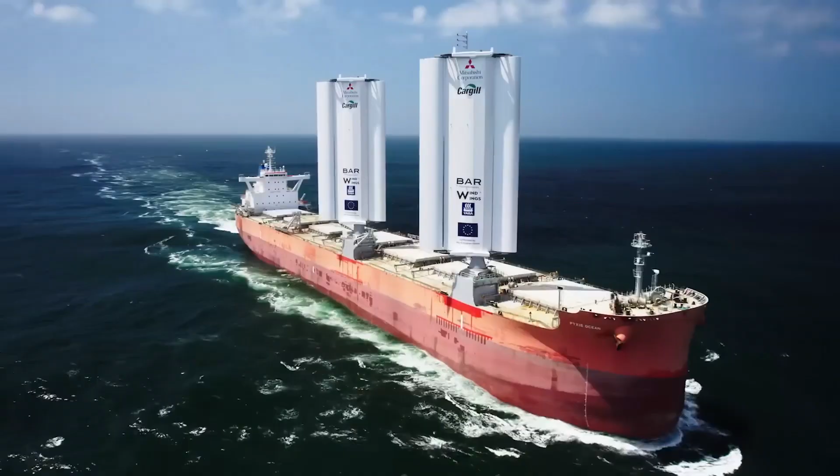This project is truly revolutionary. It's never been done, specifically not in this size and this scale. For us, it's more than commercial. We believe in decarbonisation of this planet.

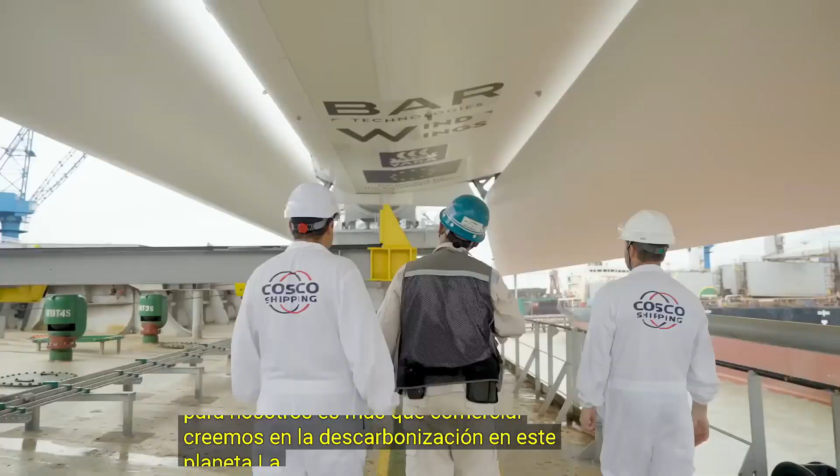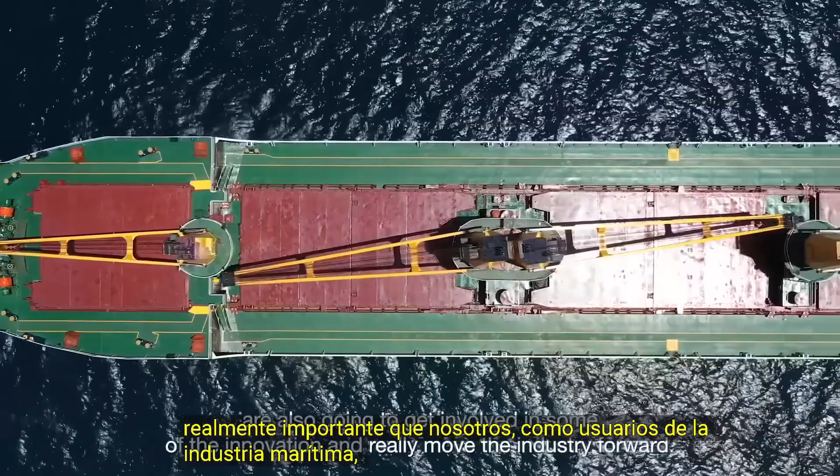Innovation doesn't exist without taking risk, but we think this technology is really a game changer. The maritime industry is an extremely hard industry to decarbonize, so there's not many tools that you have. So it's really important that we as users of the maritime industry are also going to get involved in the innovation and really move the industry forward.

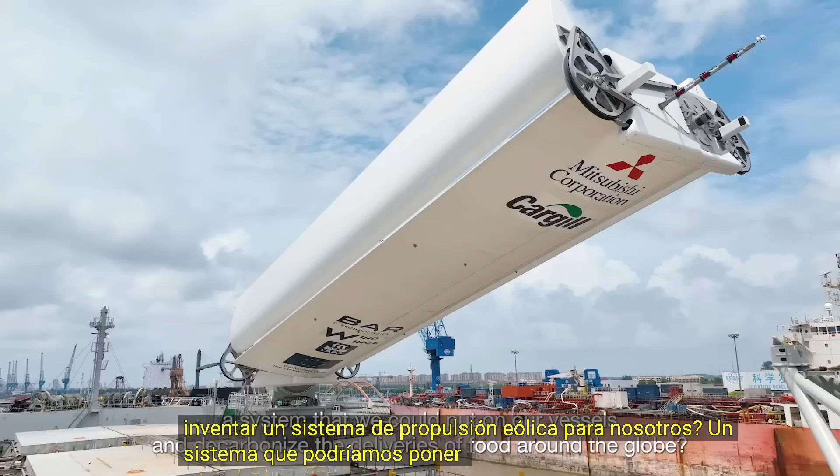Cargill phoned us and said, could you actually invent a wind propulsion system for us? A system that we could put on our vessels and decarbonise the deliveries of food around the globe. They arguably know more about shipping than BAR Tech. We're the techie guys knowing how to invent things, and that partnership's been really, really strong. So we fed off each other, and that's about energy, expertise, technical know-how, and drive and determination, because what we've done together is not easy.

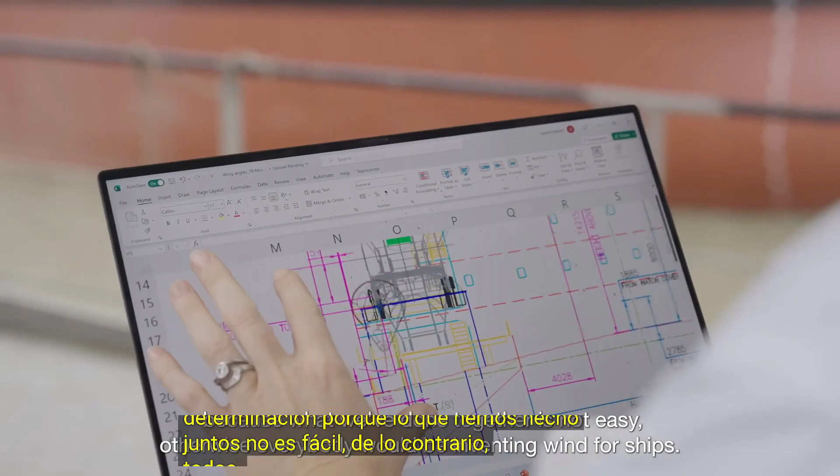Otherwise, everybody would be inventing wind for ships. We were looking for interesting technologies that we could bring in-house in order to make the maritime industry greener. And then we came across Bar Technologies with the assisted wind propulsion as a super cool technology to embark on.

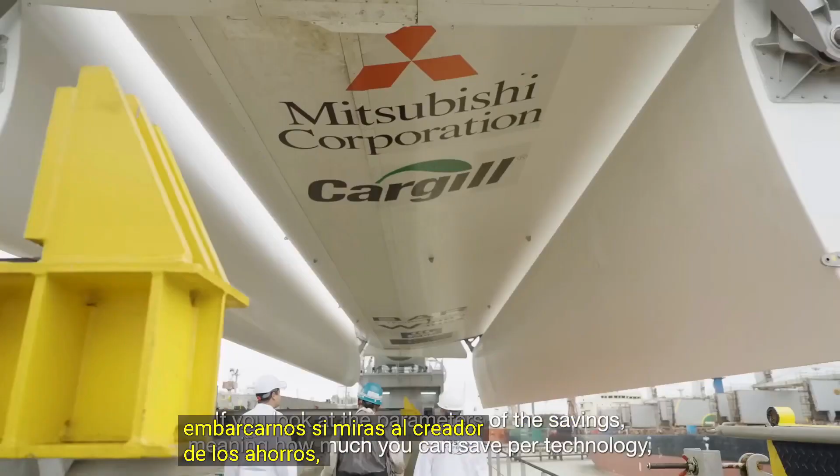If you look at the parameters of the savings, meaning how much you can save per technology, wind propulsion is one of the biggest levers you have. There are so many energy-saving devices in the market today. Wind-assisted propulsion system is one of the very few solutions available that can achieve fuel savings by double digits, and it can be retrofitted.

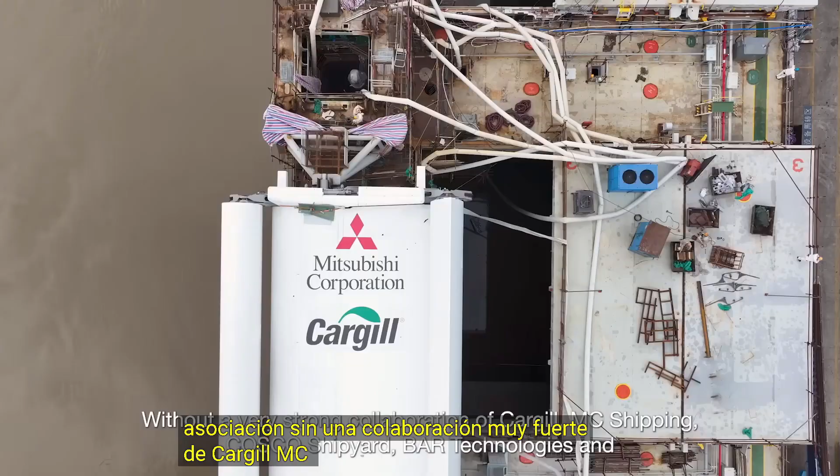One of the strong learning points in the shipping industry is it's all about partnership. Without a very strong collaboration of Cargill, MC Shipping, COSCO Shipyard, Bar Technologies and Yara Marine Technologies, we would not have been able to bring wings to the water that fast.

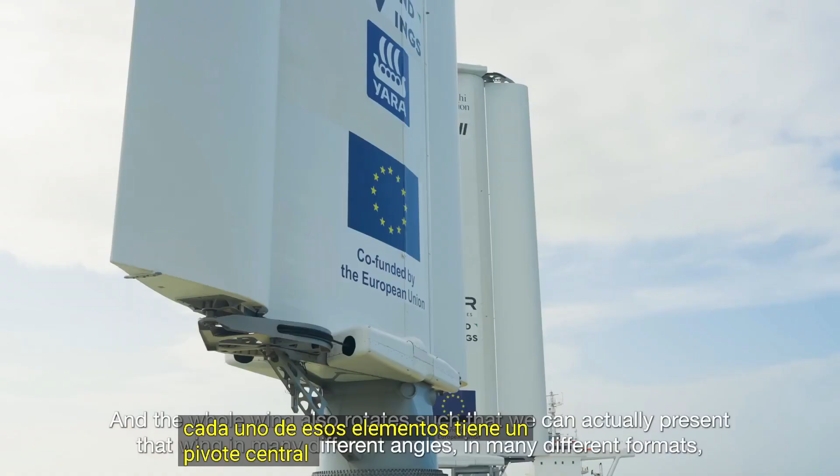The wind wing is made up of 3 elements, each 37.5 metres tall. The middle one is 10 metres wide, and the front element is 5 metres wide, a duplicate of the rear element, which is also 5 metres wide. They work together, each with a central pivot, and the whole wing also rotates, so we can present that wing in many different angles and formats, depending on the wind angle and wind speed.

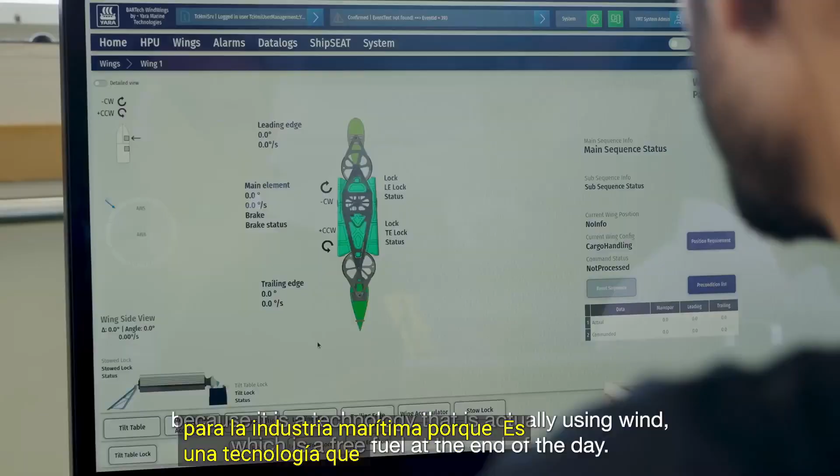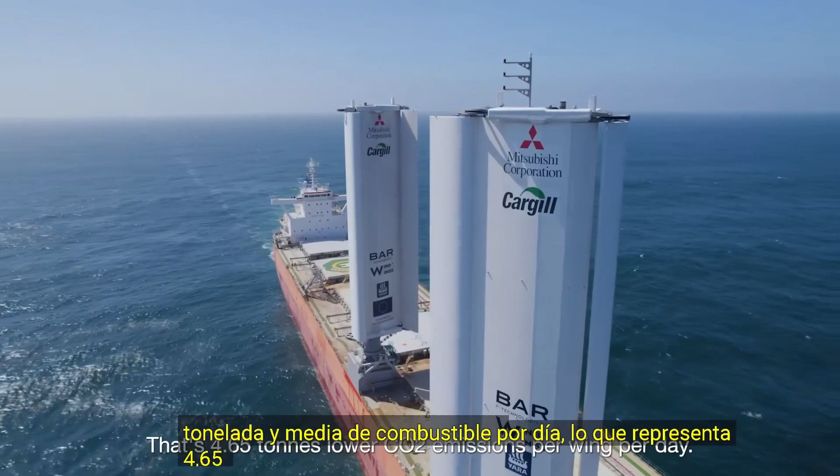This innovation is extremely important for the maritime industry because it's a technology that actually uses wind, which is free fuel in the end of the day. Each of these wind wings is saving 1.5 tonnes of fuel a day, that's 4.65 tonnes lower CO2 emissions per wing per day.

That's next level savings. We hope to gain a lot of insights from Pyxis Ocean, which would open the doors to expanded application to other ships in our existing fleet. The real fight is the legacy fleet and these new builds in the future, to bring the grain in the case of Cargill, or other goods around the world, and emitting far less.

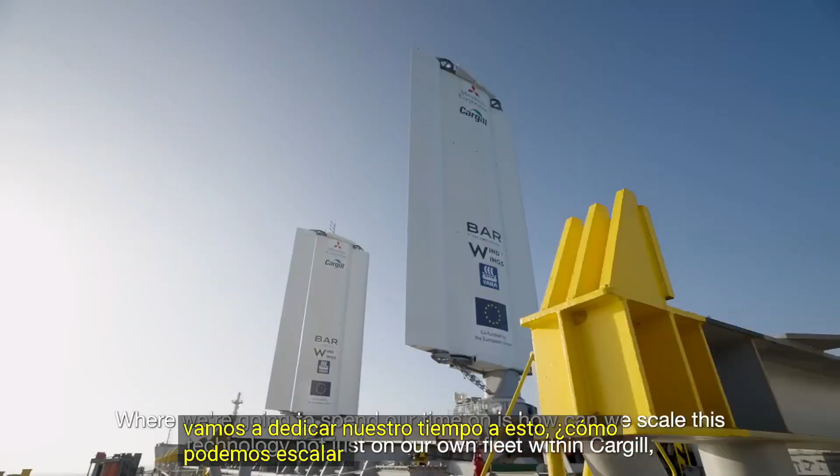Where we're going to spend our time on is how can we scale this technology not just on our own fleet within Cargill, but also very much in the rest of the industry.

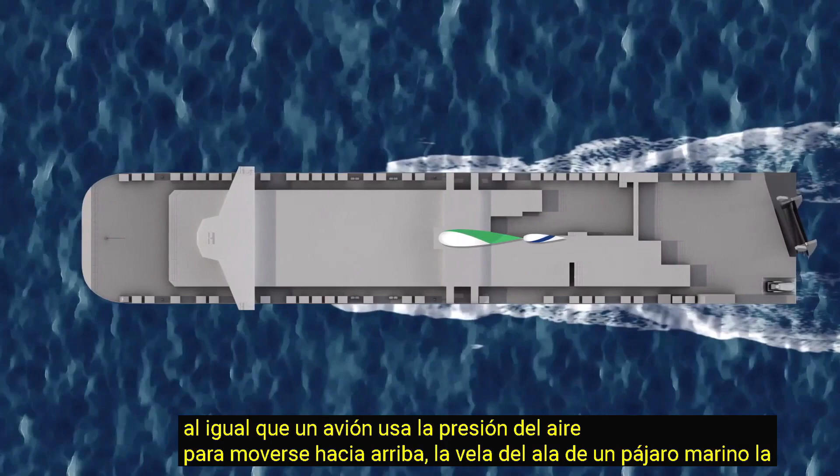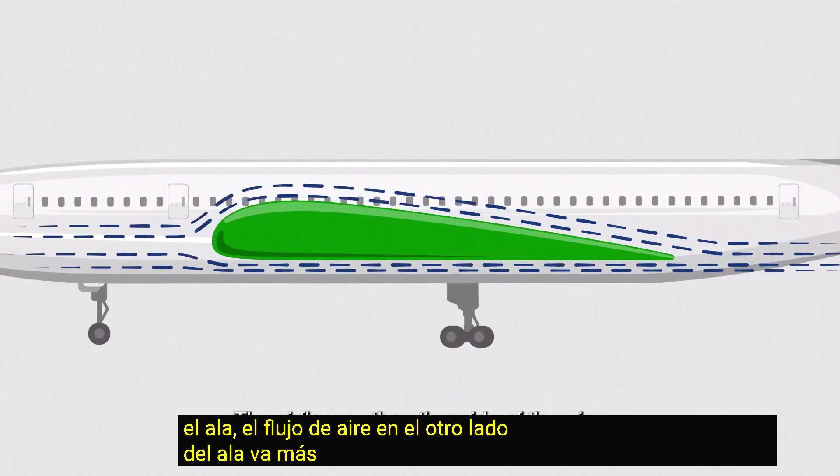Just like an airplane uses air pressure to move upwards, the Oceanbird wing sail uses it to move forward. The air under the wing is slowed and deflected downwards, which generates pressure on the wing. The airflow on the other side of the wing goes faster than the air beneath, and the pressure differential generates lift. The wing is also resisting the airflow, generating another force called drag that pushes back.

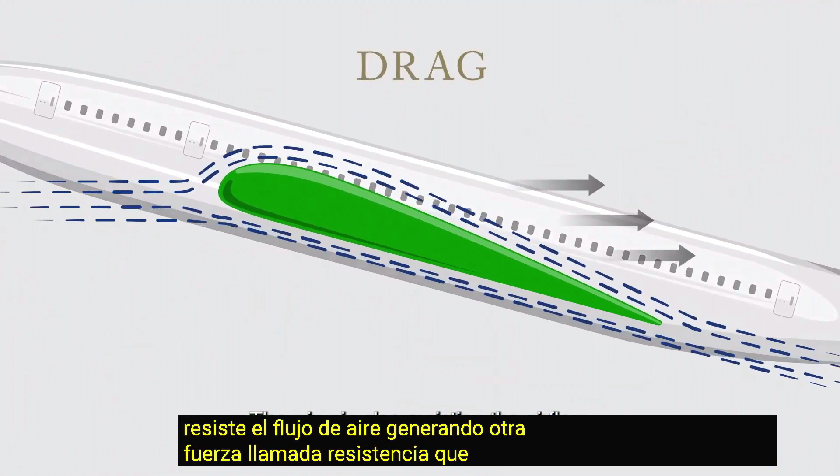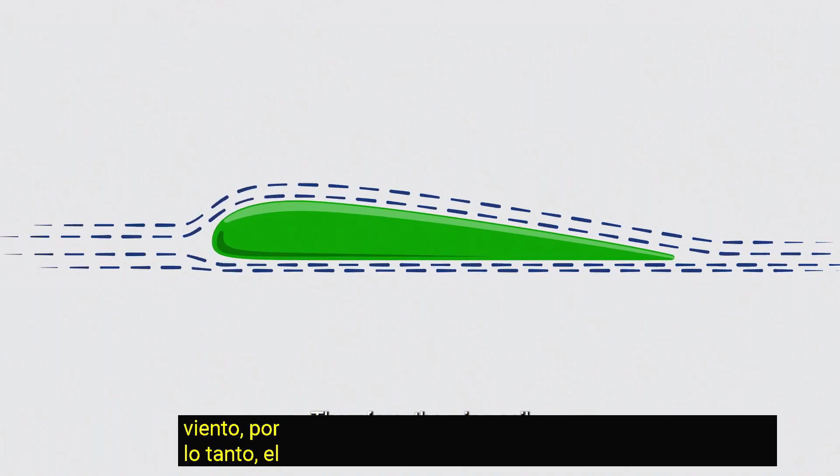To generate the most thrust forward, it is important to position the wing to get the optimal angle of attack from the wind. Therefore, the wing sail follows the wind, and unlike a plane, the wing must be symmetrical to be able to take power from the wind on both sides.

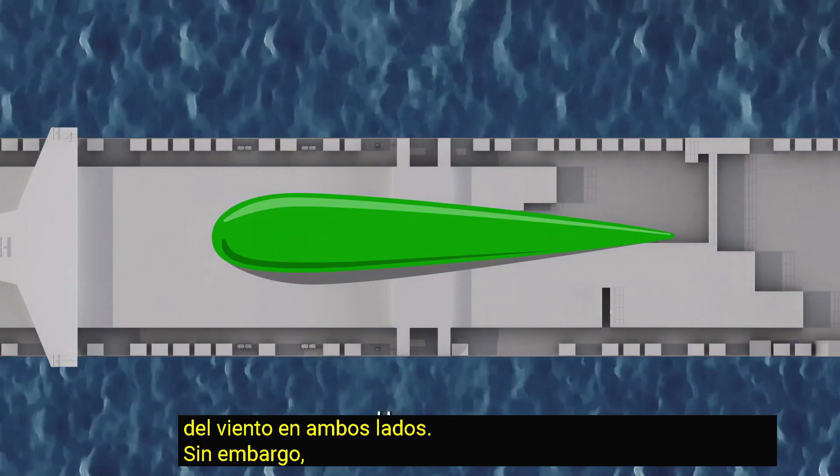However, the symmetric design has no curved camber like a textile sail when the wind blows, which optimizes the power you can harvest from the wind. That is why the Oceanbird wing sail consists of a mainsail and a flap. They form an asymmetric shape where the wind is accelerating on the outer part of the wing and decreasing on the inner part. This increases the lift and therefore the overall performance.

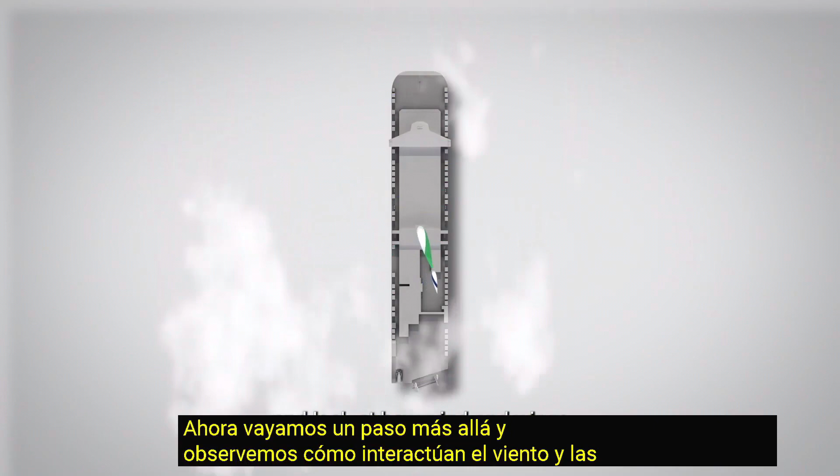By this design, we can adjust the overall shape by changing the angle of attack and create camber, which dramatically increases the performance. Now let's take it a step further and look at how wind and wings interact under navigation conditions. The actual wind is called true wind.

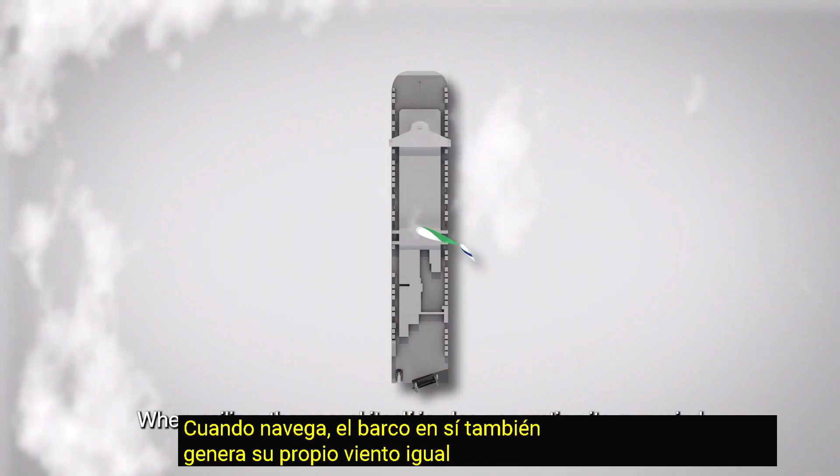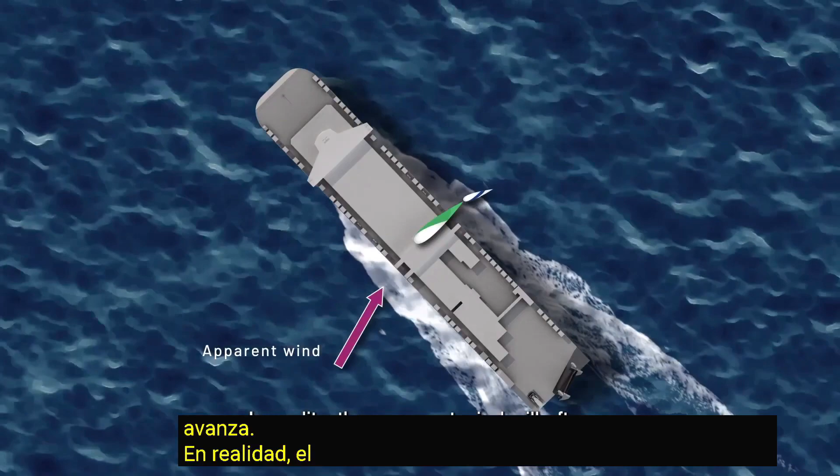When sailing, the vessel itself is also generating its own wind equal to the speed of the vessel. Apparent wind is a combination of true wind and head wind due to the vessel moving forward. In reality, the apparent wind will often have a direction close to the bow, which is a general challenge in sailing.

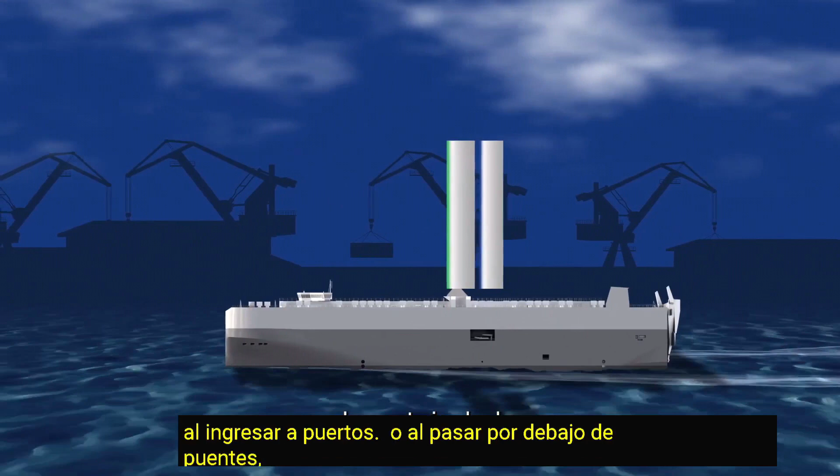However, the wing sail shows good performance for these conditions. It will automatically adjust its position, providing the best thrust forward to the vessel by setting the optimal combination of lift and drag. When the wind is growing too strong, or when entering harbors or passing under bridges, the flap folds to the mainsail before the whole wing is tilted.